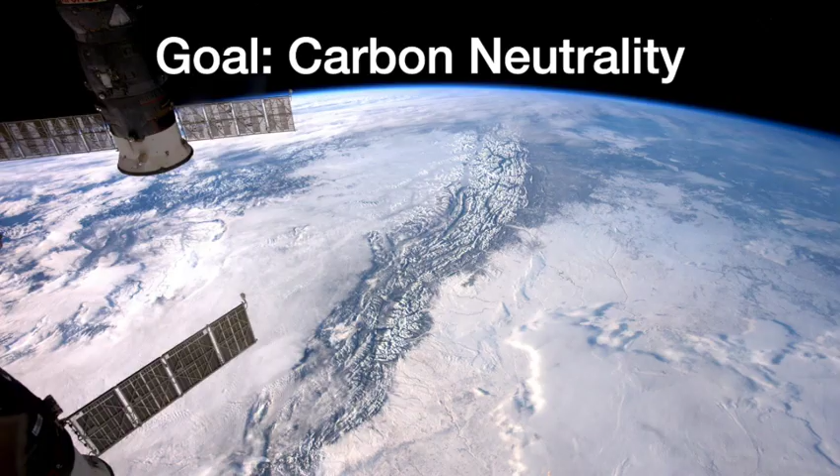Today, I want to talk about the 2000 Watt Society and Passive House, how those two approaches can deliver great results when it comes to the life cycle impact of buildings and how we approach the carbon footprint in the built environment. The goal generally at this moment in time is to get to carbon neutrality for buildings. And why would we do that? Well, we have a climate change problem that we need to tackle, and buildings are a big part of it.

Our experience is focused mostly on cold climates, so heating dominated climates. And so this is an issue that's very near to our heart because heating traditionally is provided with the help of carbon-laden fuels, and there's a carbon footprint that happens there that we're trying to eliminate. And the way that we can tackle that is with a vision. And the vision in this case is the 2000 Watt Society. I'll get into that in a moment here. And then there's an action that follows the vision, and that action is Passive House, a voluntary building energy standard.

So what motivates us at the moment is, of course, the latest IPCC report. They issued a red alert. I don't know that I need to expand on that. I would assume that anybody watching this is already well aware of the situation that we face and how swiftly we need to move in the built environment to help with carbon footprint.

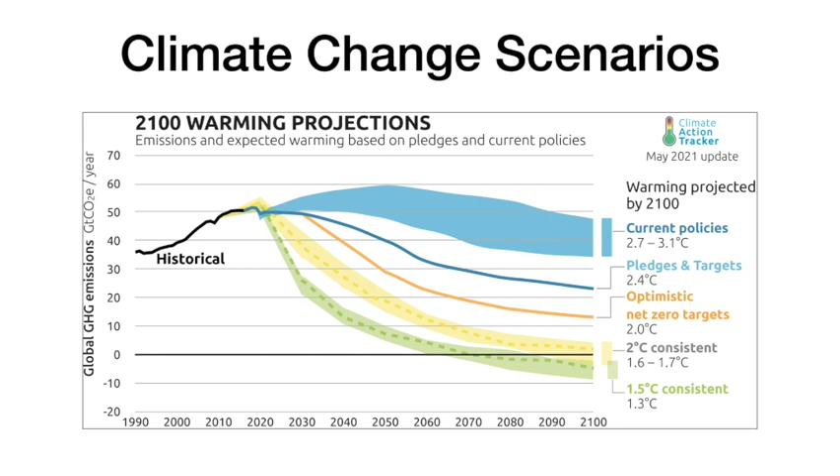One quick slide from the IPCC report shows that business as usual could lead to disastrous results for humanity. And even the most optimistic of reduction pathways still mean that some of the climate change that's here will be here to stay, and we will have to adapt. So there's urgency, and there's good reason to investigate climate footprint reduction in the built environment.

Our offices practice in the United States, and we define our climate goal as getting in line with a sustainable carbon footprint, globally sustainable carbon footprint. Generally, that's thought of to be 1 ton annually per person. There's some debate over that. It might be 2, it might be 3, it may be a half a ton, but it's certainly down there at those ranges. And the US average generally is about 20 tons.

So that's our climate goal. We need to figure out how to do what we're doing today within that 1 ton budget while maintaining our lifestyle and everything else as much as we can. So the vision that we use for our approach is called the 2000 Watt Society. The tagline here is one target for all. It is not expressed in a carbon footprint, but those two relate.

So the concept behind the 2000 Watt Society is that we look at the continuous energy footprint above every citizen's head. And generally what we find is that 2000 watts of continuous energy per inhabitant of spaceship Earth is a sustainable number. So that would be the same whether you're living in the United States and Germany or some other country around the world. And how that's generally achievable is with one strategy for all, and that strategy reads efficiency plus sufficiency plus renewables. So we have to use the energy that we use smartly.

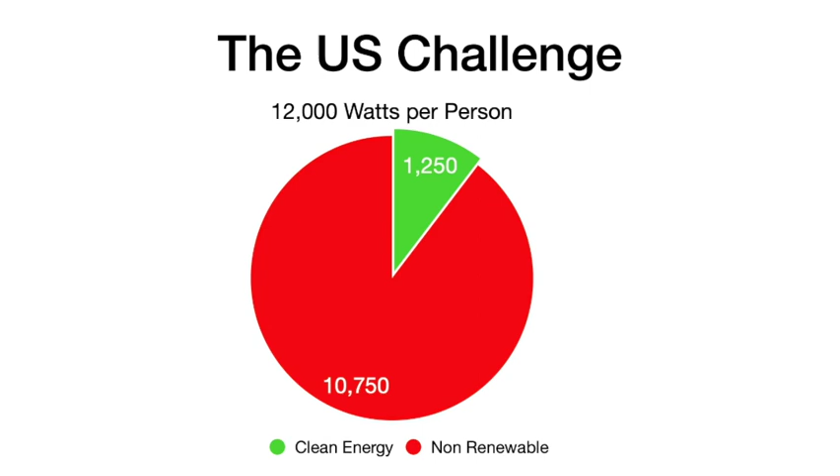This creates some realities and some opportunities. We put that in perspective here with a couple of different places around the world, and then the 2000 watt society on your right.

Our office is located in Minneapolis, Minnesota. Urban environments tend to have a slightly more favorable energy and thereby carbon footprint per capita. You can see that's already reduced significantly from the 12,000 to roughly 8,100 watts, with a small amount of that pie shape coming from clean energy and the rest still being non-renewable.

The data set here is a few years old. This stuff is getting better. Obviously, we're building a clean grid, and so the green pie wedge is growing. But the point is, it's still a large energy footprint, and the majority of it is non-renewable.

Now we look at cities in Europe that have leveraged the 2000 watt approach to see how they're doing. Arguably, we have the same, if not maybe a better quality of life in places like that as we would in Minneapolis. So we look at Munich, for instance, where their overall energy footprint is already much reduced. But still, we have a fairly high non-renewable energy content there versus clean energy.

And then we look to Switzerland, a city like Zurich, that has about the same energy footprint, but is further along in the development of the green grid, and almost half of the energy there per capita that is consumed comes from renewable or clean resources. Again, the reference on the right is the 2000 watt society, which is believed to be an ultimately sustainable footprint for our spaceship Earth.

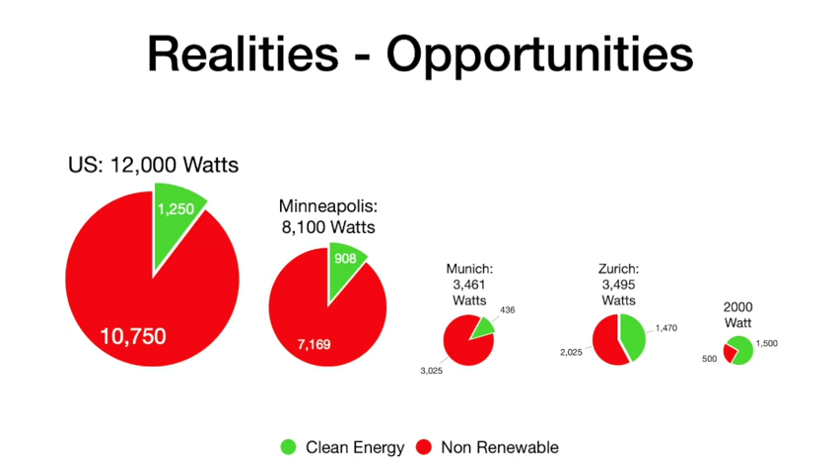So in order to transition to the 2000 watt society, we have to understand and agree which path we want to invest in. There are two fundamental approaches here. One is substitution: we simply make the clean grid as big as it needs to be to take care of the entire pie. Or we follow the 2000 watt society paradigm and we shrink our energy footprint by being smart about how we use it and what we build for, eliminating wasteful energy use and focusing then on the remainder as clean energy.

And by the way, there will most likely be some small carbon footprint, more or less indefinitely. Under the paradigm of the 2000 watt society, that is sustainable to have a small carbon footprint per capita.

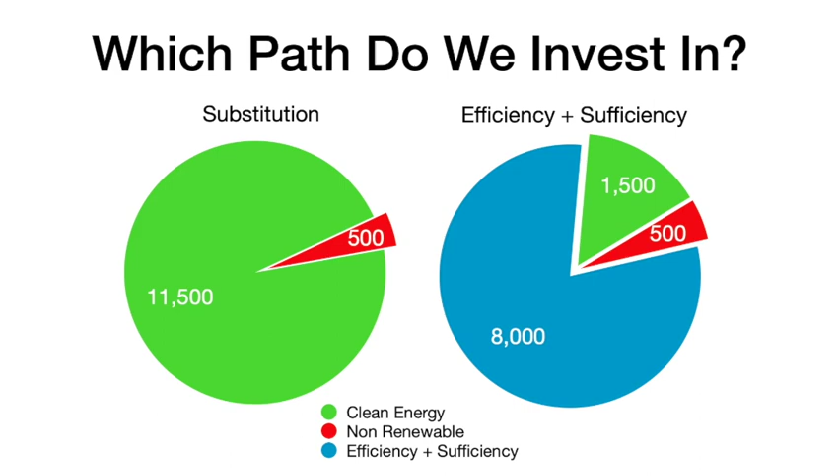I'll give you a couple of examples. So as we're at these crossroads, let's look at two places and how they are responding to this. The first one, our hometown here of Minneapolis, is currently on the track of substitution, and I suppose I could say that for the entire state of Minnesota.

So what does that mean? We're looking at a graph that aggregates all the different energy consumers in the city of Minneapolis. The current energy use has peaks and valleys and is clearly dominated by heating energy as we're in a cold climate zone - that's the gray big bulk right on top of the graph. In January, we experience our peak load. Then in the summer, when everybody's air conditioning because it also gets warm and humid here on the flip side of the season, there's a much smaller peak load.

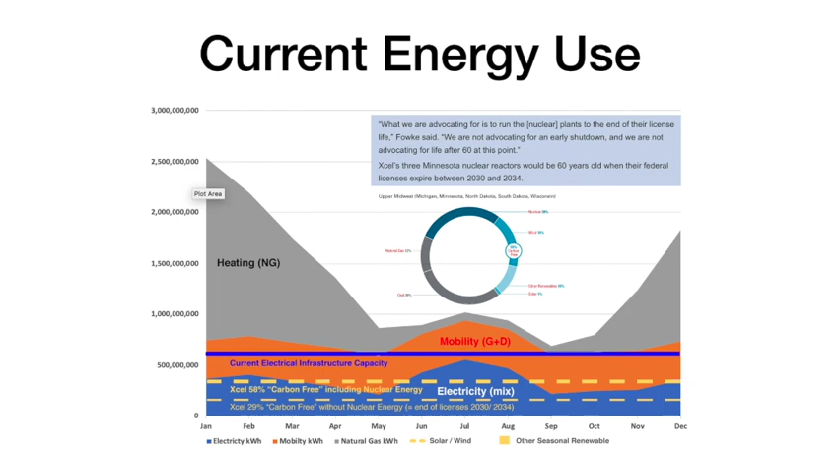In reality, the mobility curve may grow a little bit in the winter months as well, because we heat our cars and the lights are turned on more, but you get the gist of what's happening here. Peak load clearly happens in the winter. So if we look at the current clean energy plan for the state of Minnesota, which says substitution: electrify everything. So we put heat pumps in buildings and fuel our vehicles with electricity.

We have two significant challenges here. One is we have peak heating, a massive peak load right in the dead of winter when solar and wind may struggle to get on top of these loads. Solar in particular, because we have a snow load and days are short. Wind may still work fine in the winter, but you can see that peak is also very seasonal.

So to build a green, clean grid that gets on top of that peak heat load means we would have to build a massive clean grid. We're showing here one curve just to get on top of the summer cooling load, and that's already significantly larger than what's currently produced in clean energy.

So you can see where we're going with this train of thought. This is going to be a very expensive track, and it's also going to be a track that is not very resilient because we still rely on that energy being made and transferred. And so the consumers themselves, buildings in this case, are not very resilient at all. They still rely on this input.

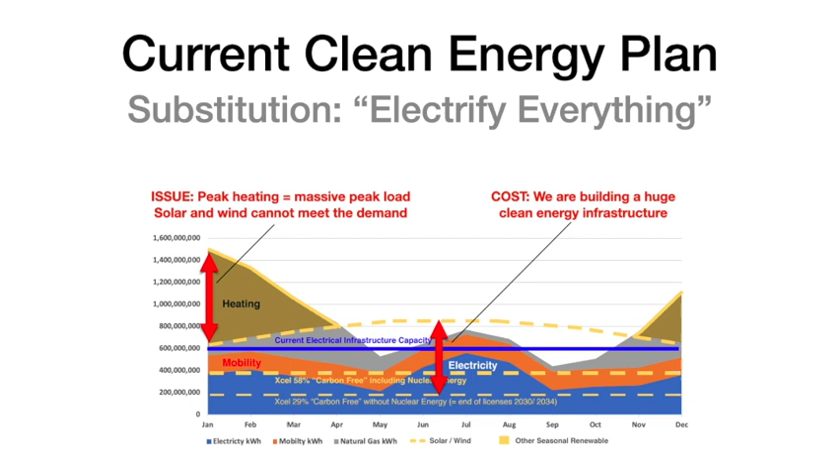So a perhaps better clean energy plan, as our firm suggested to the city of Minneapolis, would be an efficiency first approach with retrofits and passive house for buildings. And you can see here, if that were done successfully to the built environment, the peak heat demand is reduced significantly. And actually the curve for the current clean grid build out looks quite favorable.

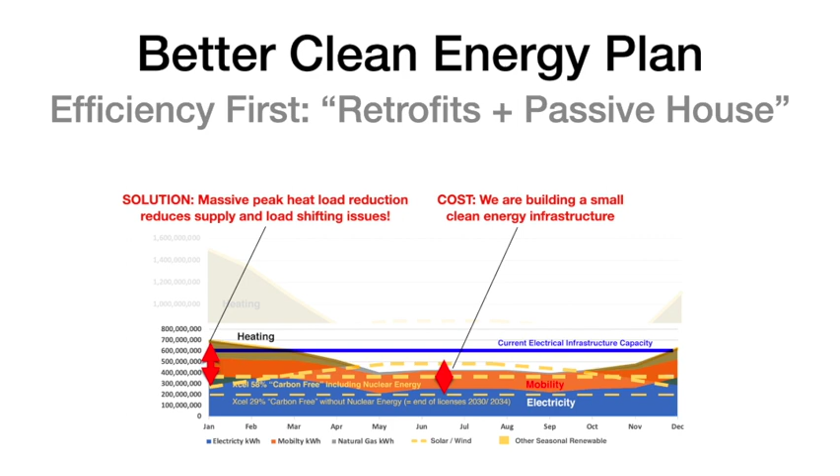We still have a seasonal load shifting challenge. But in general, we're getting much, much closer with the build out of that clean grid, the cost that is invested in that, and what it is able to provide.

In contrast to that, let's look at Vancouver, the city of Vancouver, who we advised some years ago. They're not in a cold climate zone, so it's a slightly different place, but we're talking about paradigm at the moment. And Vancouver decided to look at and pursue the path of sufficiency, efficiency, and renewables. Let's look at what that means.

So first of all, we have an energy flow. We extract source energy on the left-hand side here, carbon-laden or renewables for that matter. We pay at our meter on site, and we do all that to satisfy our need, which is things like transportation, light, heat, cooling, hot water. So that's the general energy flow as it exists today and will continue to exist.

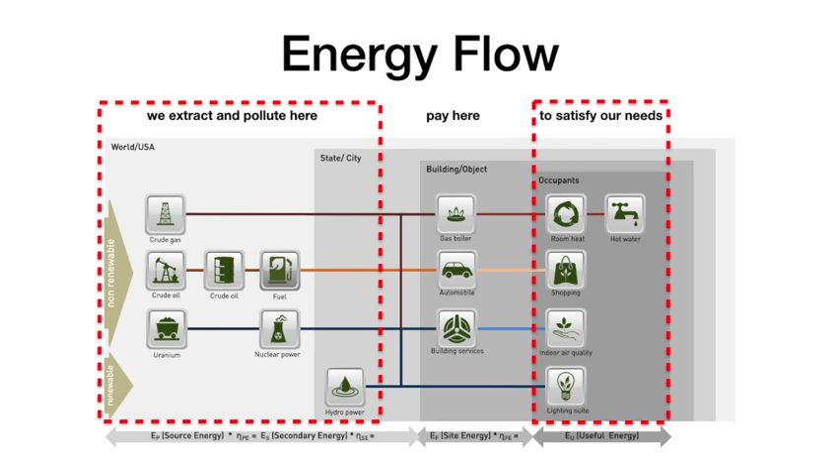So the whole reason why we extract and do source energy is to provide what we call the useful energy, and in this case, in our buildings or for transportation.

Now, the challenge we have is that the current paradigm of using these carbon-laden fuels predominantly for this is just simply not sustainable. So we need to change that paradigm over to a sustainable system in which we do more with electricity and renewables on the front end.

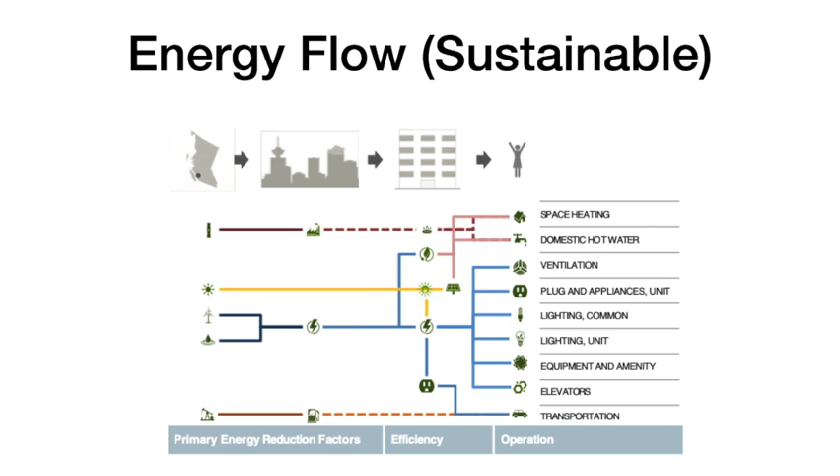And so in implementation for a city like Vancouver, we came up with a carbon framework plan that is again based on and inspired by the 2000 Watt Society, efficiency plus sufficiency plus renewables. And for Vancouver specifically, that means reducing the energy footprint by about 50% and then eliminating all fossil fuel consumption and replacing it with a new clean grid infrastructure. And Vancouver is currently doing exactly that.

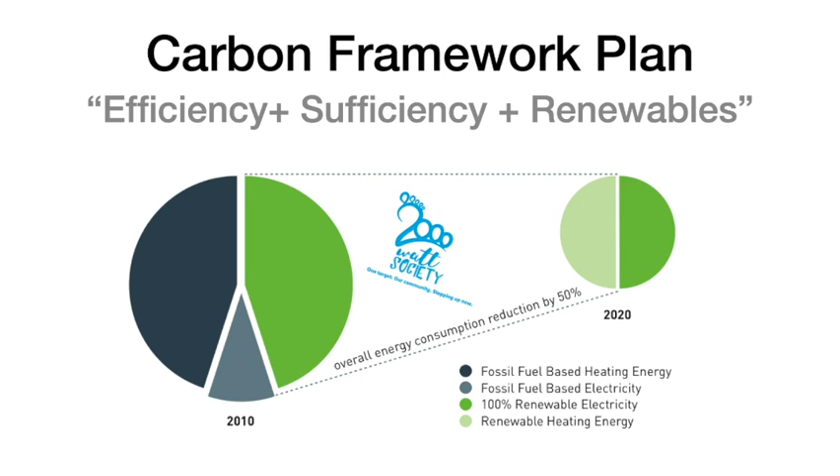And in the built environment, the way that they're tackling it is with the passive house approach. This is a screenshot from the City of Vancouver's website that talks about high performance building standards as they're mandated today. And in this particular case, they're using the passive house paradigm, which we'll talk about next.

Passive house is based on 5 basic science principles, and those are thermal insulation, passive house windows, heat recovery ventilation for the building, airtightness, and the avoidance of thermal bridges. We won't have time today to go too deep on this, but it basically means it's a really, really well-made, high-performing shell for the building that emphasizes heat retention, clean air, and free passive solar heat gains when available.

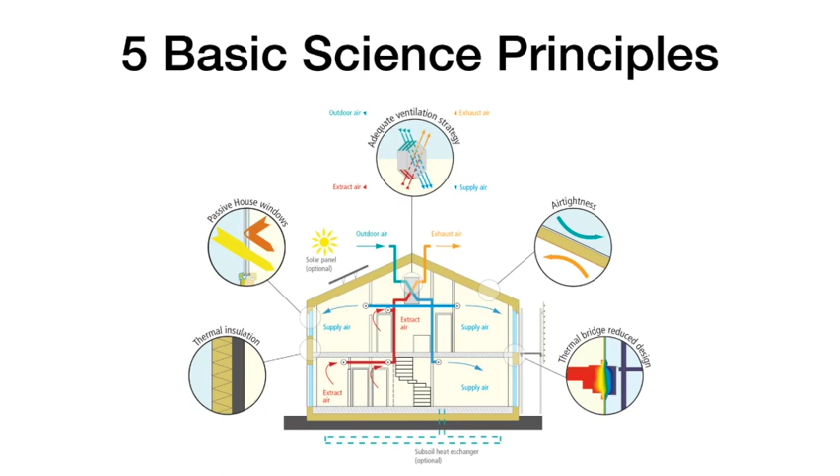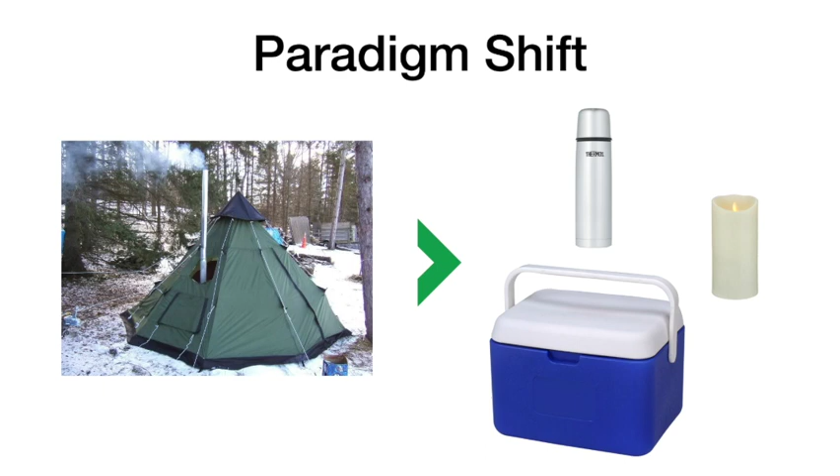The paradigm shift can also be paraphrased for our cold climate in this image here, where existing and older buildings in particular ultimately behave like a tent with a big old power plant in them. And we're replacing that paradigm for the cooler box here, signifying a highly insulated envelope, the vacuum bottle, the thermos bottle, signifying airtightness. And if we have a building that is built to that standard, we can use that candle, a very small heating source, to achieve the same thing and heat that volume.

And why would we do that? Well, these useful energy reductions, shown here on the right-hand side, light, heat, hot water, if we can be very efficient and need very little of those, then we have typically a multiplier that spools up and we reduce massive and bulk amounts of source energy on the front end.

So in the case of heating energy, if we use electricity, the grid has some kind of inefficiency where, depending on where you are on the planet, maybe only 1 out of every 2 or 3 kilowatt hours produced will actually reach you in the form of useful heat. It could be worse, perhaps even. So again, every kilowatt hour of useful heat in the building that isn't needed may equate to multiple kilowatt hours of energy that doesn't even have to be extracted and converted.

And so this is where passive house as a paradigm shines. We reduce the useful energy and spool up a multiplier on the front end to reduce source energy.

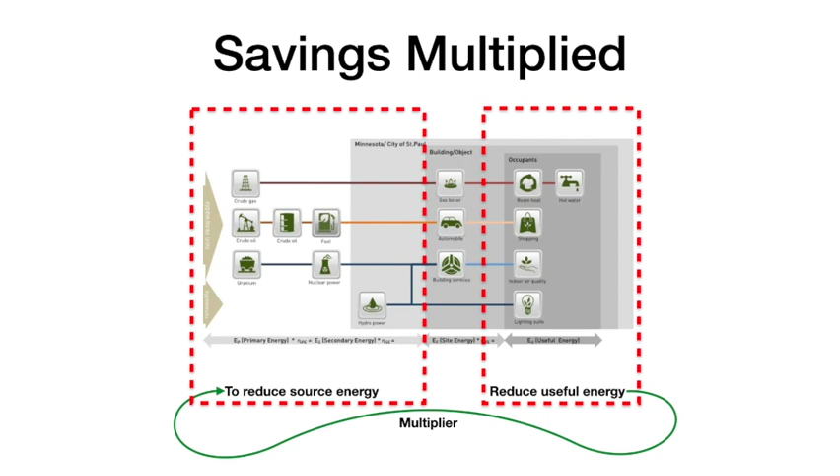And by the way, when we do that, those benefits start to multiply, because when we provide energy efficiency, by extension we also reduce climate impact. We increase human comfort - we will have much more thermally comfortable spaces. We increase resiliency - those buildings do not rely on the input of energy as much as conventional buildings. Durability is also increased - an airtight structure that is field tested for performance will generally last longer and have less maintenance than a building that is not.

And then ultimately, this also means something for life cycle cost, because we're reducing a huge amount of the operating expense, and that happens over the life of the building, meaning that the life cycle cost efficiency of a passive house is much, much greater than the status quo.

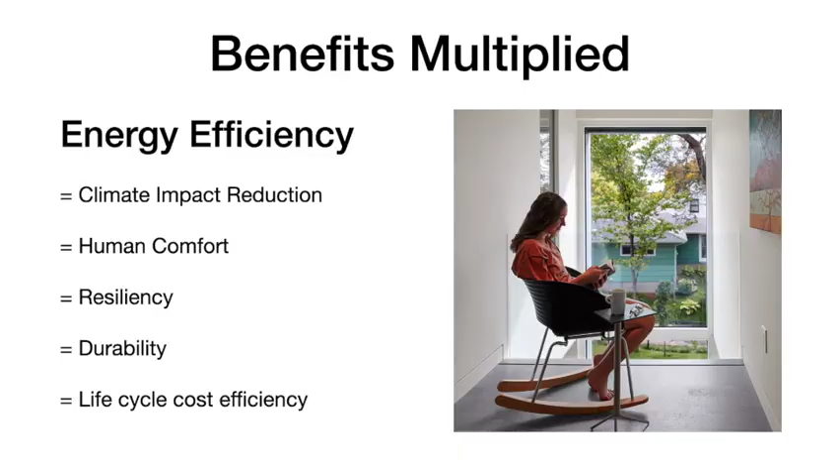So let's get into a couple of examples that teach us some valuable lessons. First one, learning from Minnesota, US climate zone 6 cold and 7 very cold. The first is the Waldsee BioHaus, an environmental learning center in Bemidji, Minnesota, climate zone 7. It was built in 2006, and it is the United States' first certified passive house. When we designed it, the brief called for a place where students can live and have classes - there are 2 classrooms and about 20 children, and their teachers can stay there, and it is part of a larger university language campus.

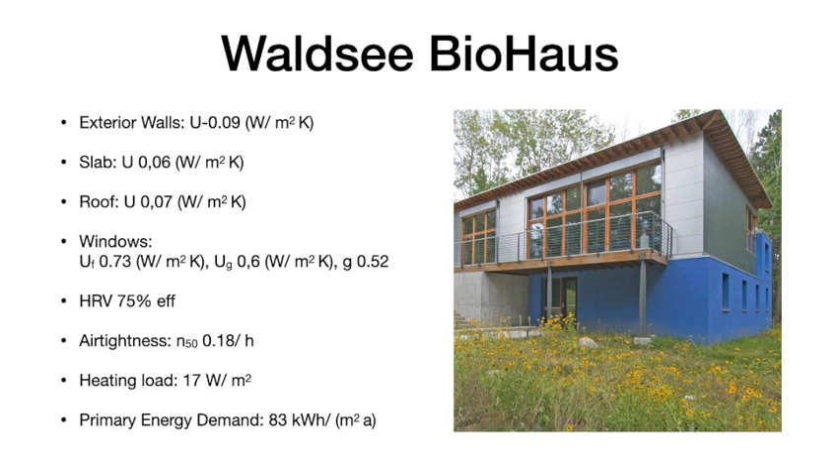I won't have time to get into all the stats for the building, but I'll leave this up and perhaps you can rewind and look at this. This gives you an idea of the performance of the building envelope items. We talked about much increased insulation in the walls, slab and roof, much better windows and doors, high efficiency heat recovery ventilation, and an airtight building. As a result, we get a really, really small heating load and a very low primary energy demand. This is all energy modeled, of course, with the Passive House Planning Package energy modeling tool.

After 10 years in existence, we went back to the BioHaus and did a quick analysis. What we learned is that the PHPP said that we would have an energy footprint of about 30.6 kilowatt hours per square meter per year of site energy. And the building performed basically on point with very small fluctuations for most of those 10 years, with the exception of the first year where there was still some construction happening.

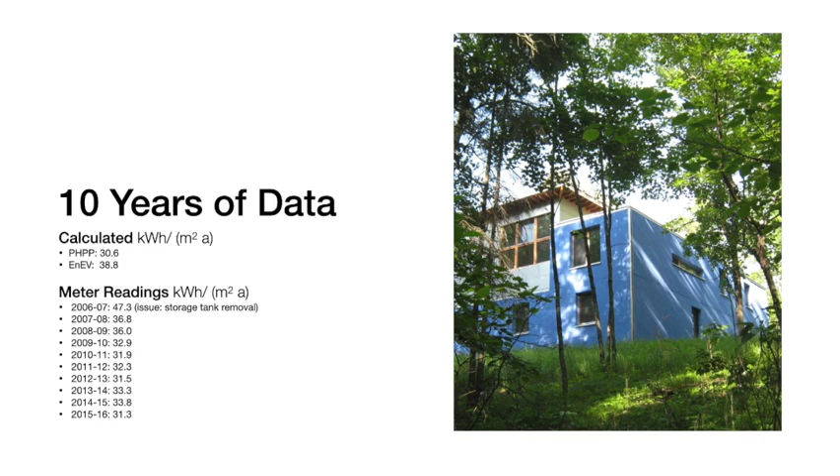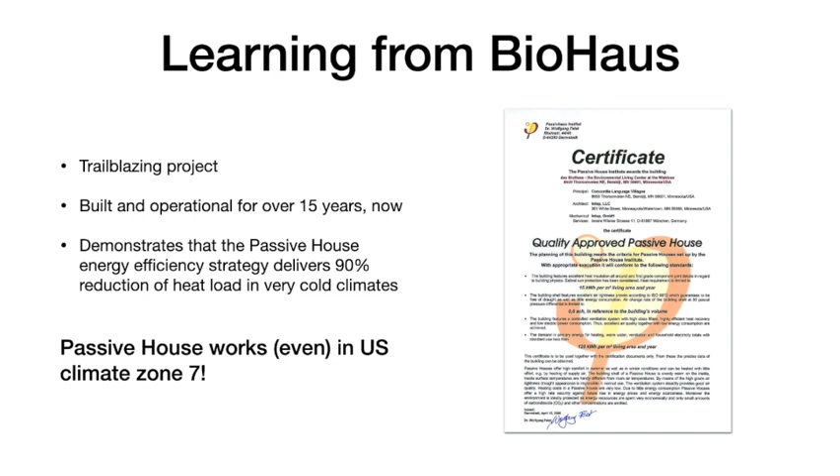So learning from the BioHaus, we find that first of all, it was a trailblazing project. We showed that in a very cold climate zone, passive house can be applied, and it actually works. The building has been built and operational for over 15 years now, and it demonstrates that the energy efficiency strategy delivers actually a 90% reduction of heat load compared to the baseline of buildings built in our general area. We move on to our second example, the Good Energy House.

It's a single family home.

It was completed in 2020, and it is the first Passive House Plus, meaning it has a renewable component that is part of the energy balance sheet. The Good Energy House was built as a demonstrator by our firm, but it also happens to be my own home, so I have a lot of anecdotal information about this project.

I'll leave this slide up for a moment so you have time to read it on your own time. You can see the building envelope and other improvements. I'd call attention again to a very low primary energy demand of 80 kilowatt hours per square meter year.

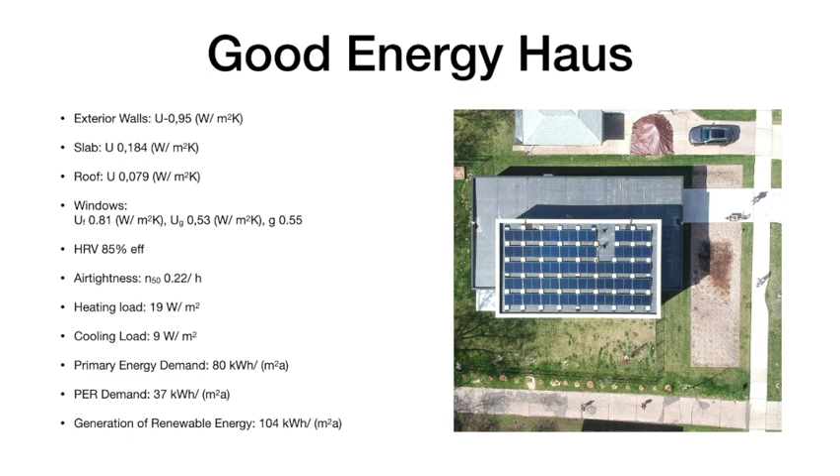And a very low PER demand, a metric that signifies the carbon impact by extension in the passive house paradigm, of 37 kilowatt hours. Also, this building with its solar panels on the roof and the predicted generation of 104 kilowatt hours per square meter a year will be a plus energy building, as the name suggests.

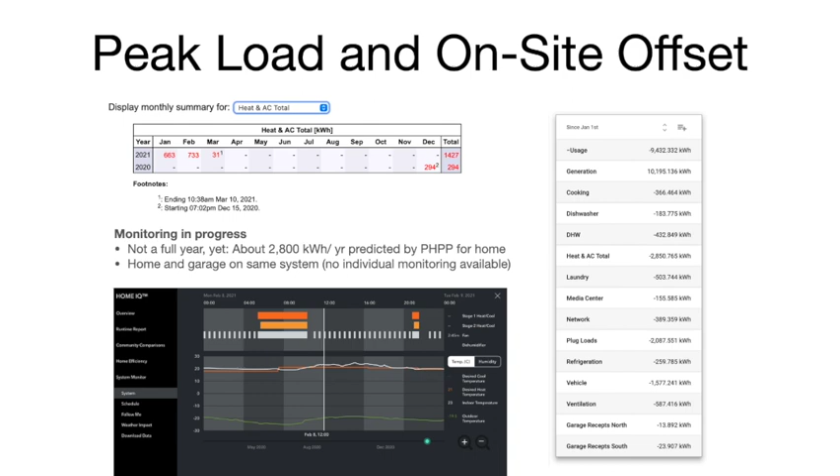Over time, we're looking at peak loads, heating loads over the winter, the building is fully monitored, and we're looking at the on-site offset. When we keep an eye on that, we learn from the Good Energy House that the peak heat load reduction that was suggested is achieved, and that the on-site renewables provide 100% of the annual site energy consumption, even including charging an electric vehicle.

So the passive house delivers a sustainable cold climate performance, which is what we're after in this paradigm of efficiency and sufficiency. I should also note it's a 4-bedroom home for a family of 4 at about just under 200 square meters of living size. So it's not huge, and that goes back to the sufficiency aspect.

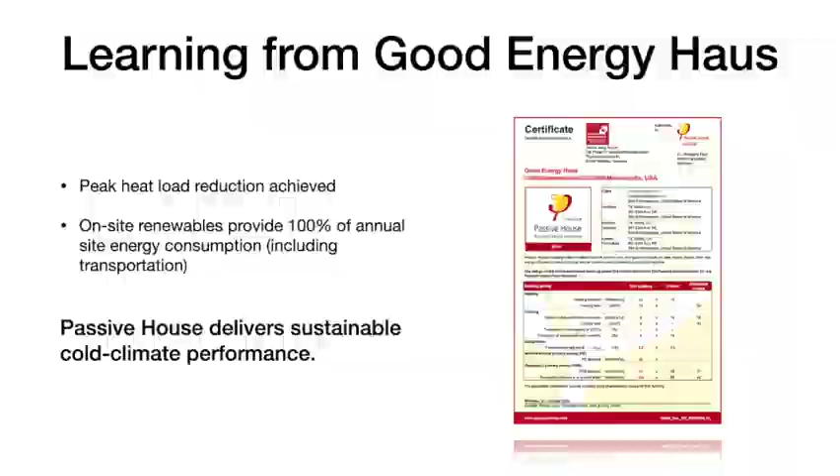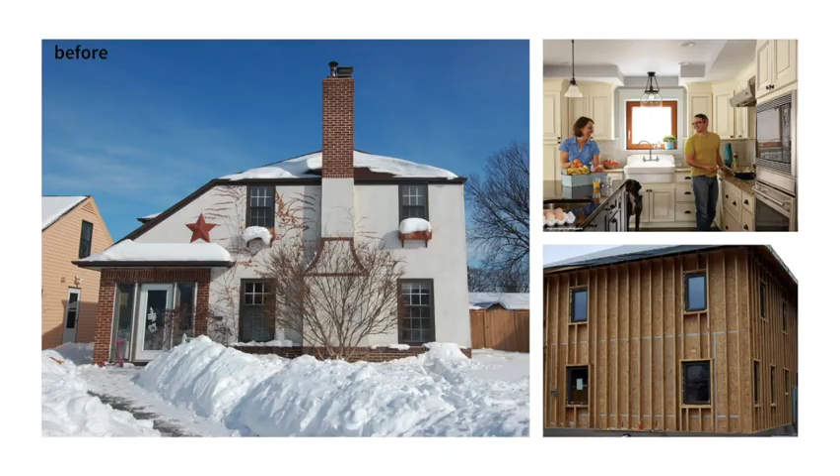Another residential example, the MinnePHit house, was the very first cold climate passive house retrofit. Passive House calls that EnerPHit. It was a pilot project done in 2012, where the house was converted from a 1935 single family home to a certified passive house.

We're not going to go very deep here, but we want to leave you with a lesson learned from the MinnePHit house: passive house retrofitting also works in a cold climate zone. We were able to retrofit the building to the performance criteria set forth by the Passive House Institute, and the performance in the real world, measured at the meter, is actually very near what new construction passive house delivers. So the good news is we can retrofit and achieve a very similar result, and it works in a cold climate zone.

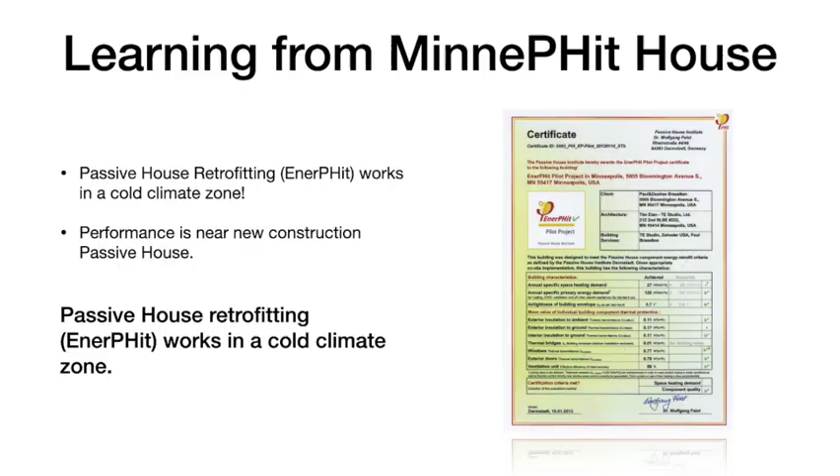From here, we advance to larger buildings: Hook and Ladder apartments, affordable multifamily housing in Minneapolis, done between 2018 and 2020. Our work actually preceded the construction a little bit. It's a new construction multifamily building with about 55 units.

Some observations here are that the site energy is once again reduced significantly. We're looking at about a 2/3 reduction over the status quo if it had been built to the current energy code, which is significant. And that also leads to energy cost reduction.

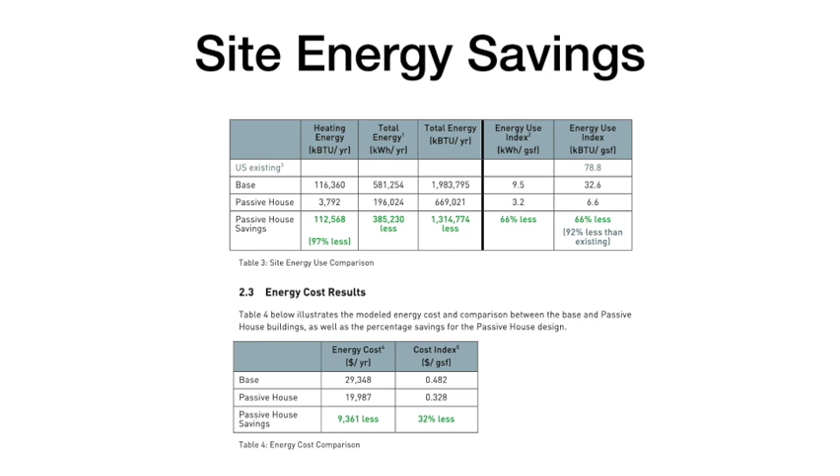Now, a building like this will be all electric to fall in line with the clean grid, so no more burning of fossil fuels, no natural gas infrastructure. The energy cost reduction is perhaps not quite as great as the energy savings, because in our area, natural gas is a lot cheaper per kilowatt hour than electricity.

On the source energy side—remember the graph, going from the useful energy back to the beginning of energy at the source—we see a similar reduction of about 2/3, and the CO2 savings can be significant, anywhere from 40 to 75%, depending on how this building is fueled and how we measure that. In general, it would be fair to assume we're cutting the carbon footprint of these buildings in half when we build them to the passive house standard, and that's before we throw renewables at it—looking at a conventional grid mix, which in Minnesota is still dominated by fossil fuels.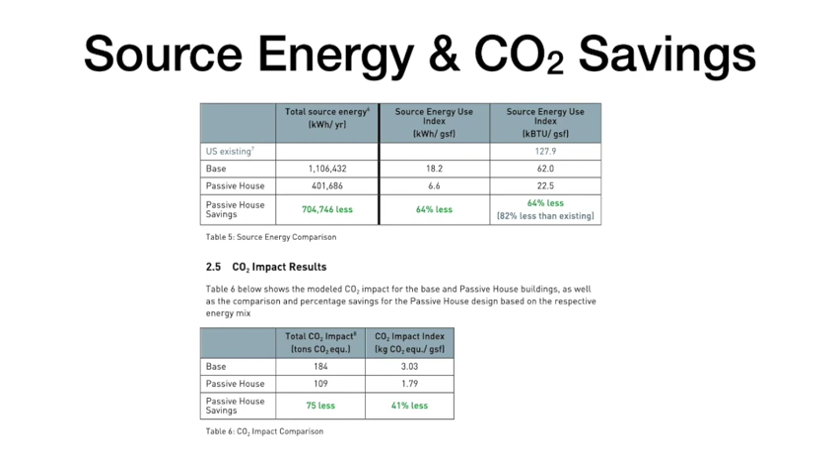The point I'm trying to make is that this will go much higher and has the potential to be 100% when we connect to an all-clean grid. The Hook and Ladder building actually has solar panels on the roof, but in the initial reports we weren't looking at that to help us with efficiency. And then, last but not least, the cost savings are also there.

So this is affordable housing in Minnesota. Those owners have to hold the buildings for 30 years. They're leased to people with subsidies. And so we find that we can see anywhere from 3 to 8% annual annuitized life cycle cost improvements, even under current conditions. So that's current electricity and utility costs.

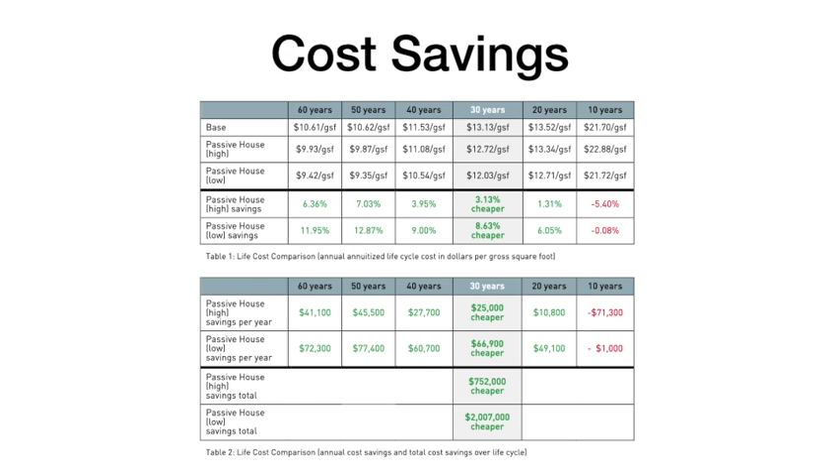That's looking at things like refurbishment that come into play, and that's why sometimes those numbers are negative when we reach points where we have to make an investment again. But the point is, and this is where developers perk up, is that especially if they hold these buildings as they do in affordable housing, this is actually savings towards their bottom line.

So the main lessons learned from Hook and Ladder: passive house works for larger buildings in a cold climate zone, and the annuitized life cycle costs are better than business as usual. So we have a good example here.

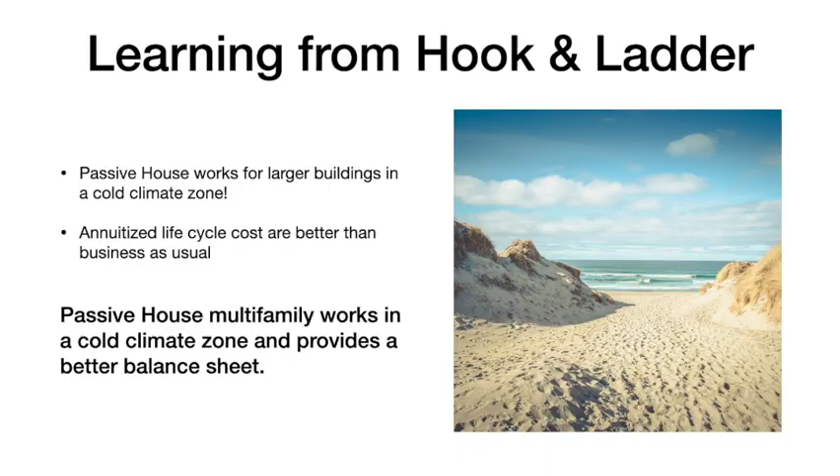And then we get to one more example, which is affordable housing retrofitting. Elliot Tower, also in Minneapolis, Minnesota. This is a retrofit of, I believe, a 14-story building, all affordable housing, so subsidized housing, with exterior and interior improvements.

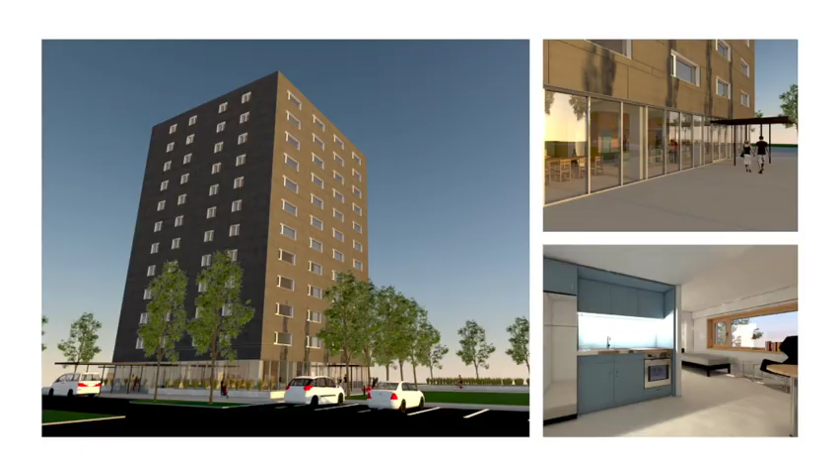And the main takeaways here are, again, energy and load reduction. Now the existing building is virtually uninsulated, so we're providing a heating energy reduction of 94% by using the passive house paradigm. Cooling energy will go down 30%, and comfort is going to be increased incredibly on both sides of the seasons here, because the building will be insulated and airtight.

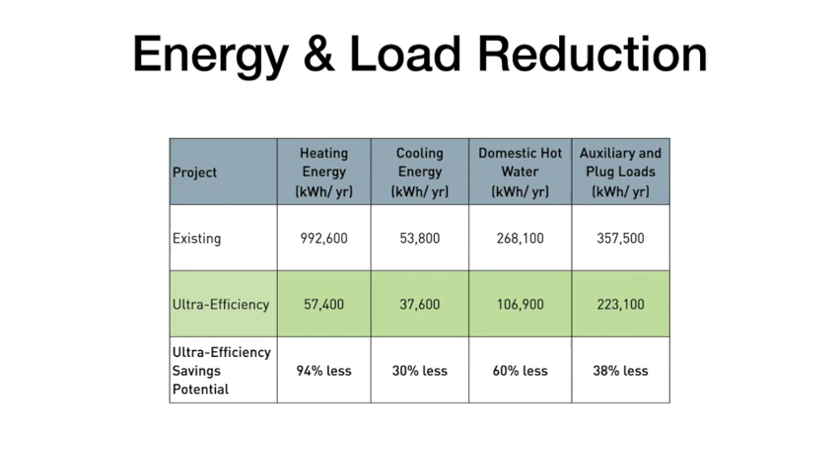We can be much more efficient with how we do domestic hot water, and even reduce some of the auxiliary and plug loads in the building. Site energy cost and CO2 savings go right in line.

So with this project, energy consumption on site can be reduced by three-quarters. The site energy costs by about 60%. Again, gas being cheaper than electricity, it doesn't quite track along at the moment, but it's still significant. And the CO2 impact of this building will also be reduced by well over 50%.

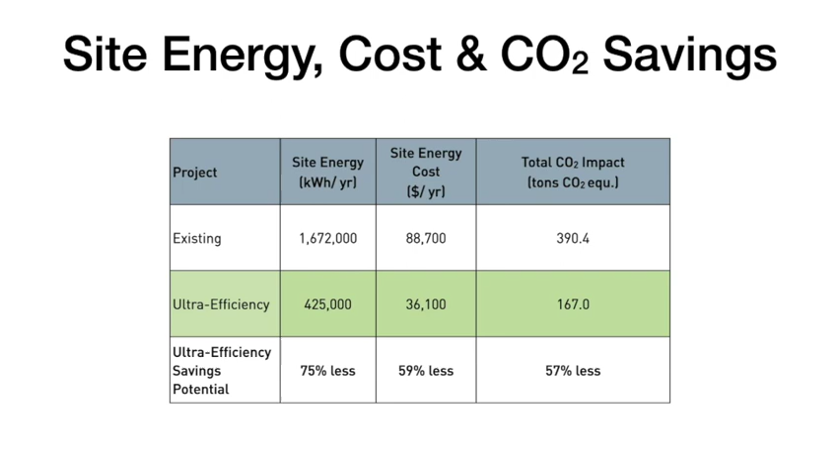So learning from Elliot Tower, we can see that passive house retrofitting works for larger buildings in a cold climate zone. The heating loads can be reduced in excess of 90%, and the CO2 reduced by over 50%, before we account for renewables. And this fits the paradigm of a green grid much, much better.

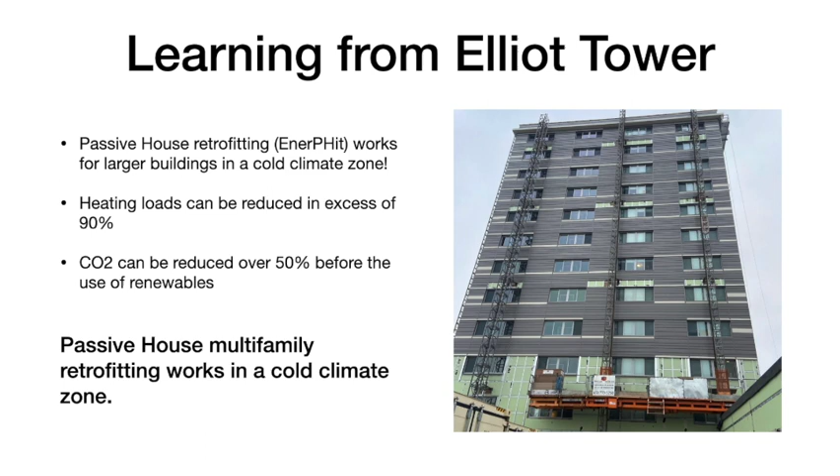So I will conclude by telling you that the 2000-watt society, with sufficiency, efficiency, and renewables, and a target of 2000 watts per capita, is an effective strategy for climate neutrality and clean grid optimization. Passive House supports the 2000-watt society energy target for the built environment. So those two have a really nice handshake.

In Minnesota, in a cold climate zone in the United States, we have examples from the last 15 years that illustrate that the concepts are applicable even in this very cold climate zone, and they provide peak load, CO2, and life cycle cost optimization in a very cold climate.

In addition to the environmental benefits, we have another perk that we haven't really talked about today, but it is worth considering: we have an opportunity for economic growth because this work needs to be done. We need to train people to do buildings right and retrofit them at scale. So there's an economic growth opportunity.

And I think in particular, when we're looking at affordable housing projects, as shown in these examples, there's also an opportunity for social justice, where people of lesser means quite often live in quite substandard living environments. So by retrofitting in particular, and building new affordable housing with the passive house standard, we significantly elevate the status and therefore provide a significant contribution to social justice.